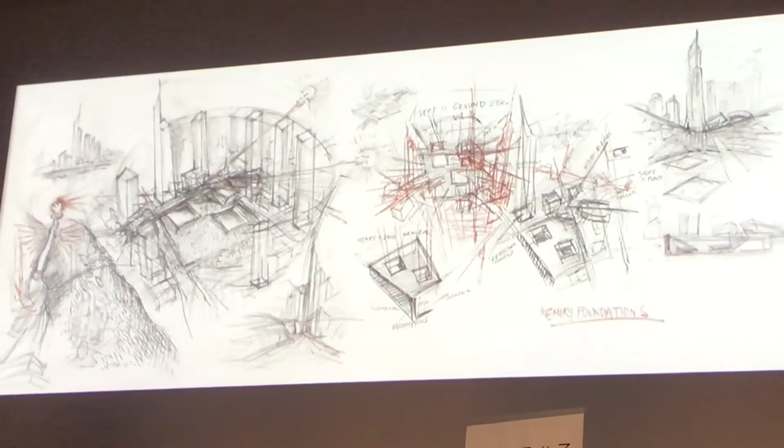Of a mega structure in the center. By the way, all my colleagues, great architects, the 7 finalists at the competition, proposed the Twin Towers, large mega structures, of Norman Foster, of Richard Meier, of Steven Holl, of many famous architects.

I thought nothing should be built in the center of the site where people perished. 3,000 people from 90 different countries. It was not just Americans, 90 different countries.

And I show you this not out of vanity, but out of the fact that this project has many stakeholders. Here are the stakeholders: the families of the victims, who are in the thousands, uncles, brothers, sons, daughters, cousins, in the tens of thousands of people. Those are the families, that's the stakeholder.

The Port Authority of New York, 7,000 architects and engineers, who owns the land of this site and who leases this land to private developers and their own architects.

That Port Authority is governed by 2 governors, very powerful governors, the governor of New York and governor of New Jersey. Very important. The streets of New York are not governed by the governors, but by the mayor of New York.

And under the street run the path trains, which are run by the independent path train authorities, and subways run by the Metropolitan Transportation Authority.

So you can see, plus federal agencies involved in funding some of the project, you can see that the client is not in the thousands, but in the hundreds of thousands of people.

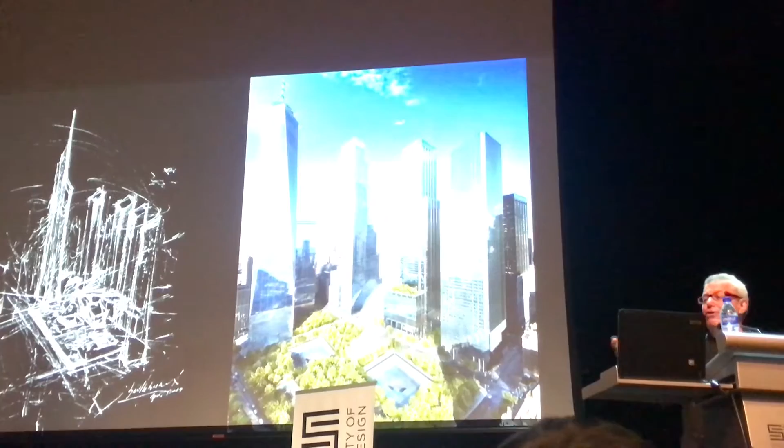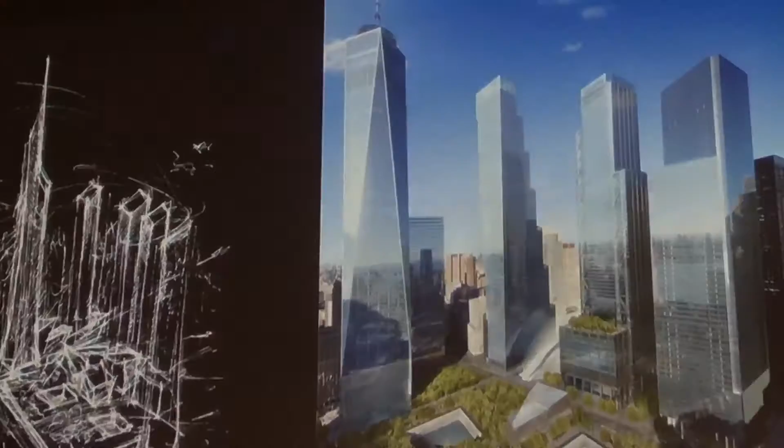Of course, the developers have different ideas. So that's my sketch on the left. And I have to say, on the right is a rendering, pretty close to what is there now. And that's the trick: how do you go from an idea to reality?

Because most master plans are just fantasies. They're never built. They're abandoned halfway through. But you have to be very practical. And that's what I did.

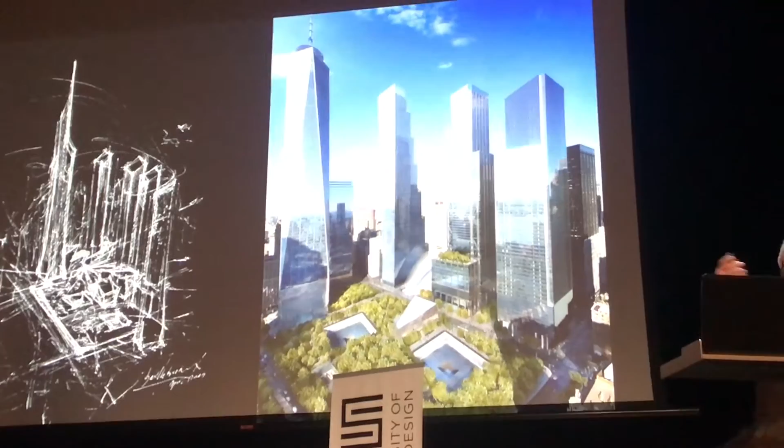I divided the site into separate towers. That's why I didn't build a mega tower, because nobody has money to buy, to build mega towers. Divide the site into smaller towers, so people can fund 1 tower at a time, as the money allows, as the economy allows.

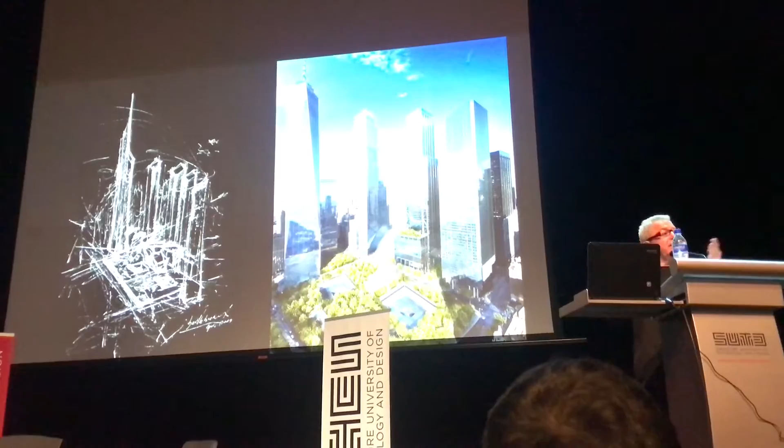And then protect the public realm, the center, the footprints, the memorial. That's what it's about. There it is in site plan.

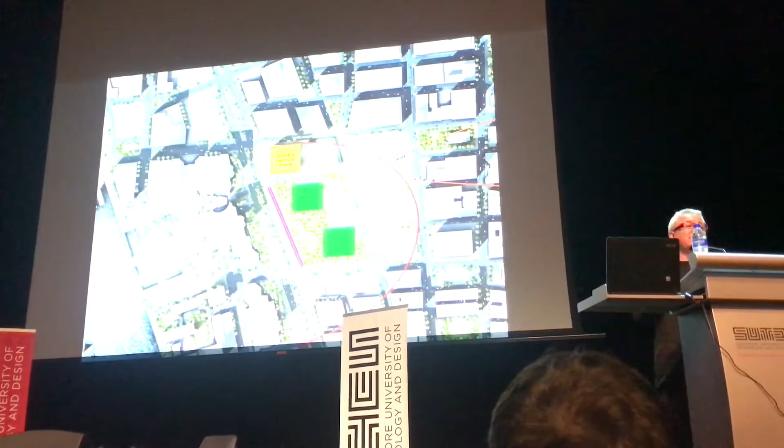On the left, you see Hudson River. You see that block. And it's very important to understand that it's not a self-standing block. It's connected to Battery Park, to Wall Street, to Tribeca, to Chinatown. It's really a living part of the city.

And the heart of the project is not what you see on the ground. Really, if you're architects, engineers, people interested in technology, you know that it's not what you see that is important. It's what's down below the ground.

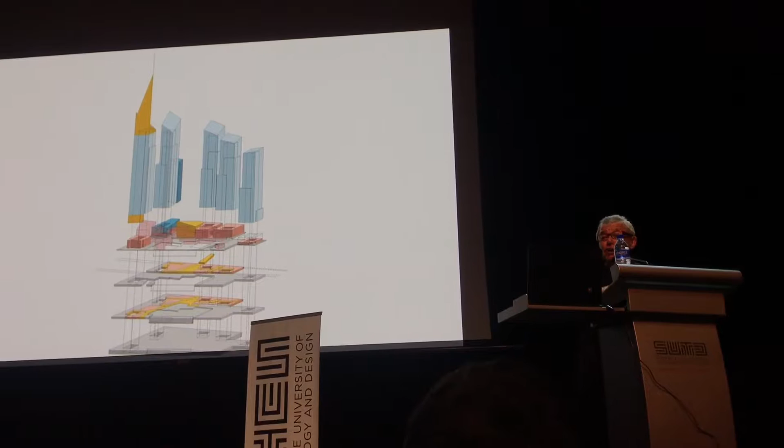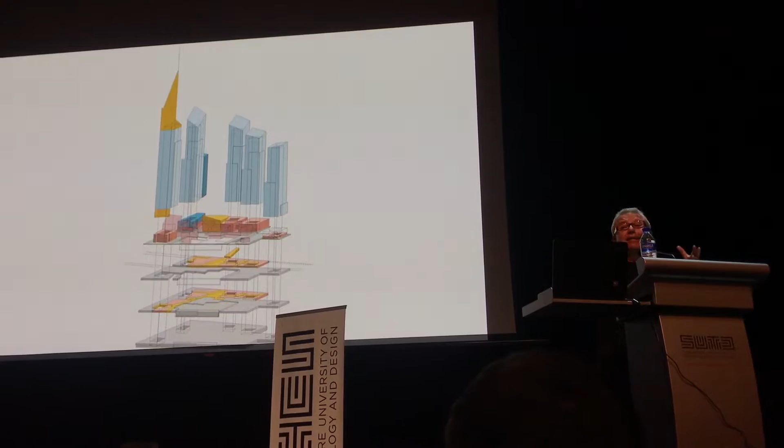And below the ground are 75, 80 feet of infrastructure, levels of foundations, levels of trains, levels of connectivity. That has to really be given to all the people who will be working on the site in order to create really the site as it can be built progressively into the future.

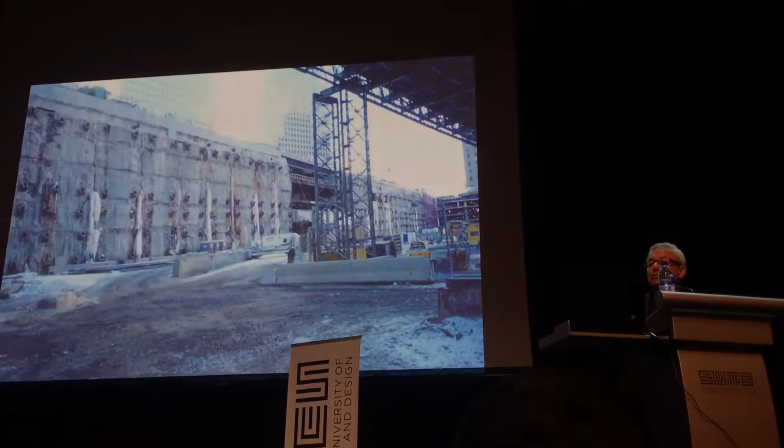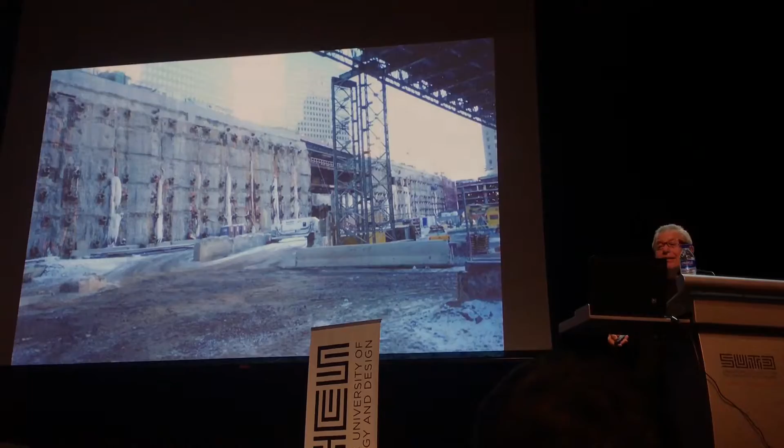And I was very moved actually when I came to the site. I have to tell you a story because it's interesting. I was standing with all the finalists, my famous friends, at the top of One Liberty Plaza, looking down on the site. And somebody said, does anybody want to go to the site?

And everyone said no, because it was a very dark day. It was November, it was raining, it was cold. Everybody said it's much easier to see the site from the top. We were on a very high floor, looking right down at the site.

But I said, Nina, let's go down, we want to see it. And I have to tell you, as I went down this ramp, 80 feet down below street level, my life changed.

I realized that there's something different here. It's not about buildings. No one declared this ground sacred, but there's something that you touch when you come to the bottom of the bedrock.

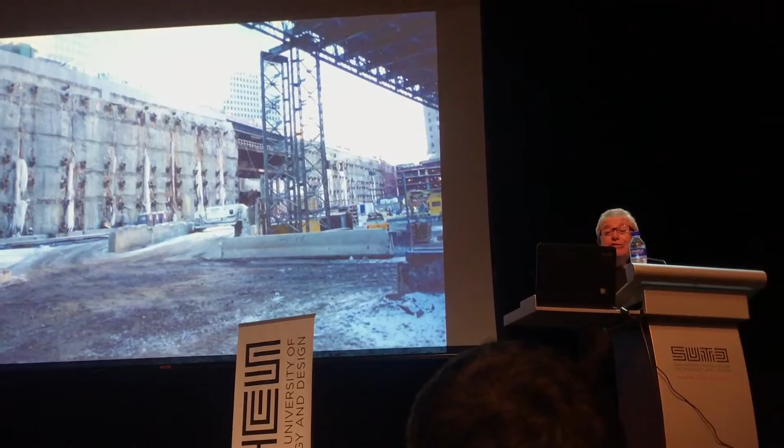I touched this wall, and the engineer told me it was a slurry wall. I wasn't exactly clear - I studied architecture, so what exactly is a slurry wall? It's a dam, a huge dam. On the left side is the Hudson River, with all the pressure of the Hudson River behind it. If this wall had collapsed, all the subways would have been inundated by waters. It would have been the apocalypse.

That wall was very important to me, and it's hard to maintain because a foundation is meant to be built upon. Structurally, you cannot have a living foundation which is just empty. You can see it in Rome or in Athens - old foundations standing. But this is a new foundation, still supporting the highest buildings in the world.

I had the good fortune to work with the engineers of Port Authority who believed in my idea. It's hard to do, to expose the foundation, but I wanted people to see it from the bedrock, and that's now in the 9/11 Museum - one of the most important features for orienting what is below the ground.

When Pope Francis came to New York recently to give an ecumenical address about peace, representatives of all religions were there. He could have chosen St. Patrick's Cathedral or Times Square or some other place in New York City, but interestingly he chose to give his address at the slurry wall. It was a statement about peace, about memory, about rebirth, about optimism, but also about history.

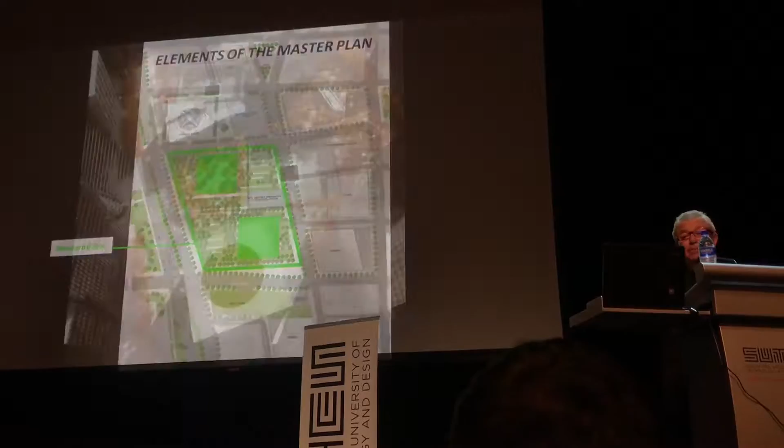The footprints of the site, the public space, now has the Performing Arts Center and Visitor Center going on. It's important to understand that from the 16 acres, half of it - 8 acres - I preserved for public good. That's very hard when you're required to build 10 million square feet of office space, 5 million square feet of cultural space, 5 million more of infrastructure. You have millions of square feet of development, yet it was very hard to preserve a mega space, the largest piazza in New York, and I thought that was important.

The water was also part of my master plan, because I thought you need nature, but you also need the acoustics of a waterfall to make your experience of reading the names on the edges of these footprints meaningful. And indeed, in Michael Arad's memorial, that waterfall is really there. I was criticized by the tabloids - Libeskind wants to bring Niagara Falls to New York - but it was a good idea to bring the waterfalls.

It's a public space, and it's very popular. There are more than 25 million visitors annually to this space, and yet it's still a building site - it's not completed.

One more thing you should know is that my aim in rebuilding this project was not just creating buildings and the master plan, but affirmation of life after death, after tragedy, after the attack of terrorism. That affirmation of life has happened because more than 200,000 people have moved to Lower Manhattan since I started working.

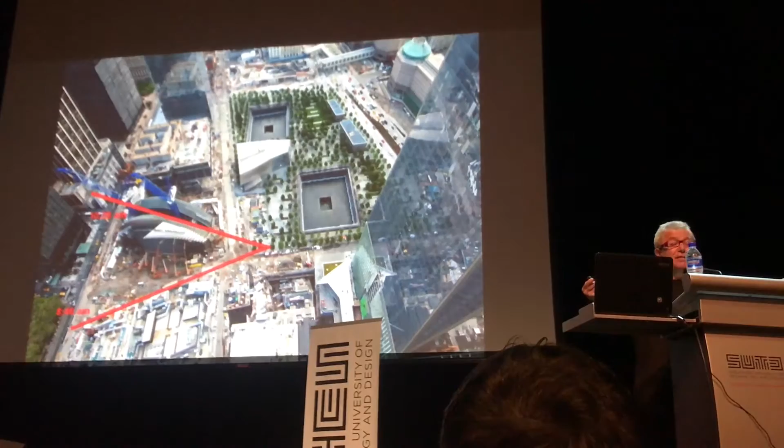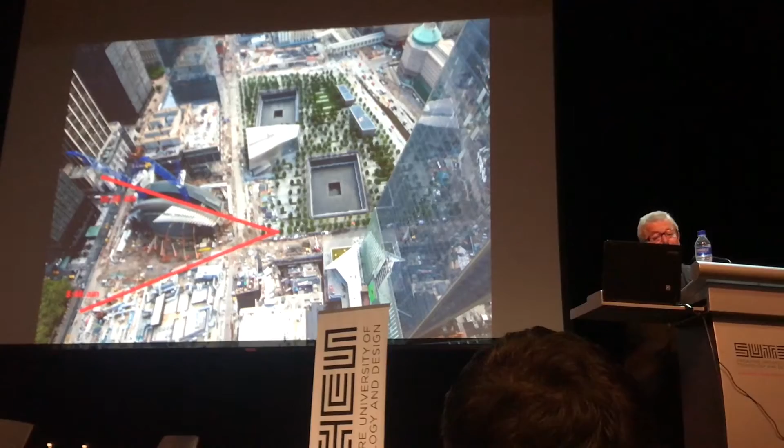I introduced a secondary public space, which no one asked me for - New York never has enough space. I call it the wedge of light. At 8:46 a.m., when the first tower struck, there's a line of light which defines an edge of a building. At 10:28, when the second tower collapsed, is the center of the PATH Terminal, a very dramatic skylight. So it's a memorial in light, and a memorial for the public.

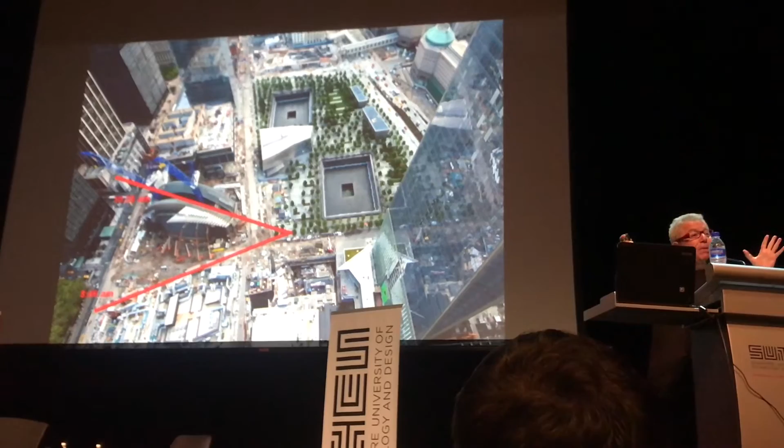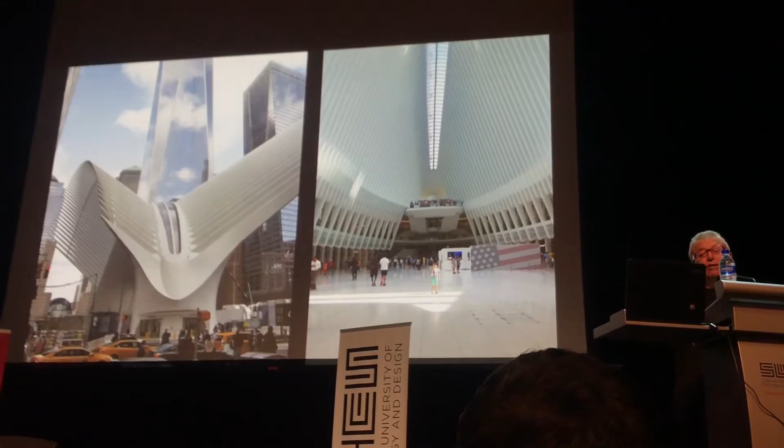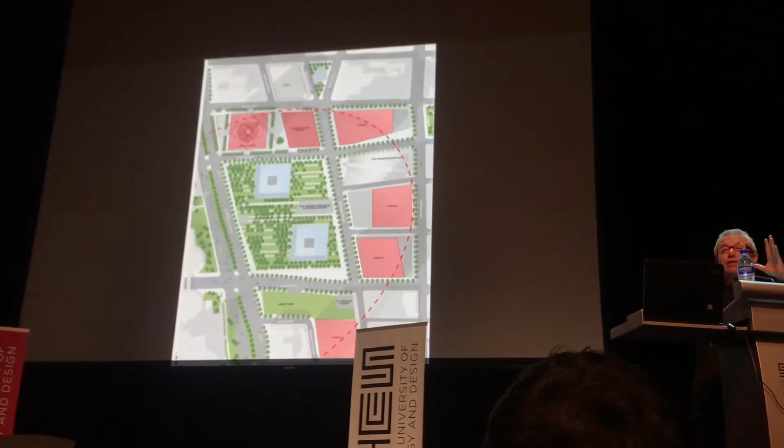Even on a dark day, when there is no sunlight, you will feel the shift of the grid in New York. There is the PATH Terminal connecting things underground, as I showed you - a very important building on the side. And here you have the building standing within the grid, but also within that torch of liberty, which really is in the center of the site with the footprints and the memorial.

And there is the picture of the wedge of light. There is the early drawing of the buildings, of the open space. And as you will see, pretty soon, with all the towers built, seen from long perspectives.

And I have to tell you, I was an immigrant to New York.